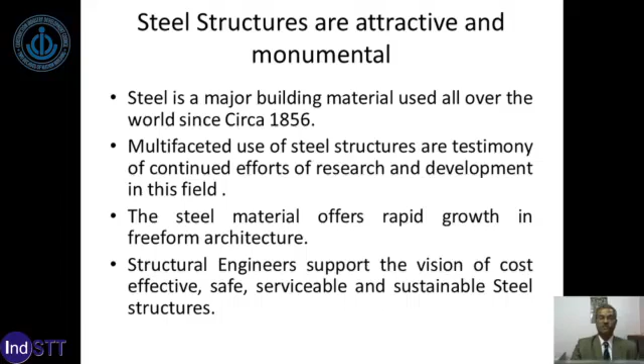Steel is a major building material used all over the world since circa 1856. Multifaceted use of steel structures are testimony of continued efforts of research and development in this field. The steel material offers rapid growth in free-form architecture. Structural engineers support the vision of cost-effective, safe, serviceable, sustainable steel structures.

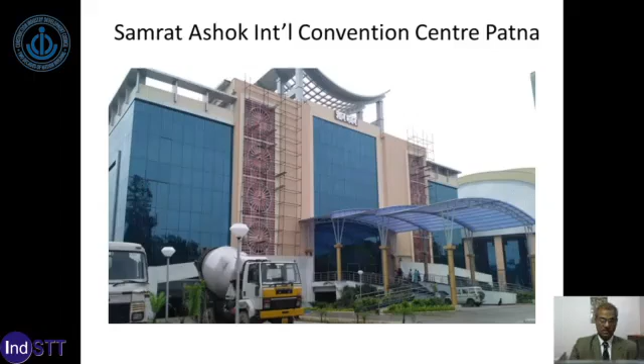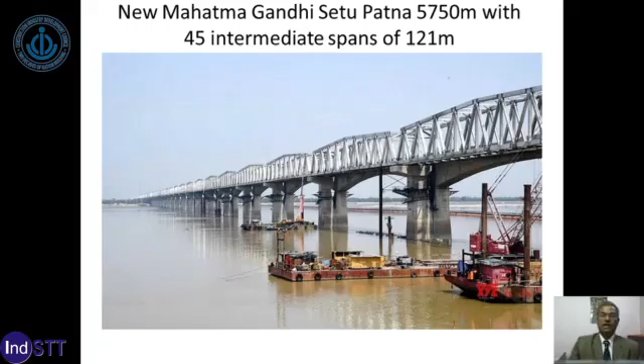Some landmark examples of Indian steel structures are the Howrah Bridge, the Samrat Ashok International Convention Center at Patna, which contains a Gyan Bhavan of 800 capacity and a Bapu Sabhagar of 5000 capacity. The Mahatma Gandhi Setu Patna, which is 5.75 km long, is another landmark steel structure. The Digha Railroad Bridge in Patna, which is 4.5 km, is a marvelous example of railroad bridge.

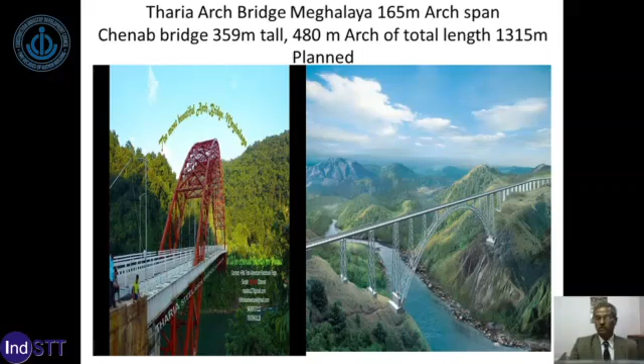The Tharia Bridge in Meghalaya and the Chenab Bridge in Jammu and Kashmir, which is 359 meter tall and 480 meter arch of total length 1315 meter, has been planned. When it will come to reality, it will become the tallest arch bridge of the world.

The 305 meter TV tower in Fazilka and 471 meter tall guyed mast in Kattabomman in Tamil Nadu are other examples. O.P. Jindal Knowledge Tower in Hisar, which is 282 meter, and Wills Tower Chicago, which is 482 meter, are the marvelous examples of high-rise steel structures.

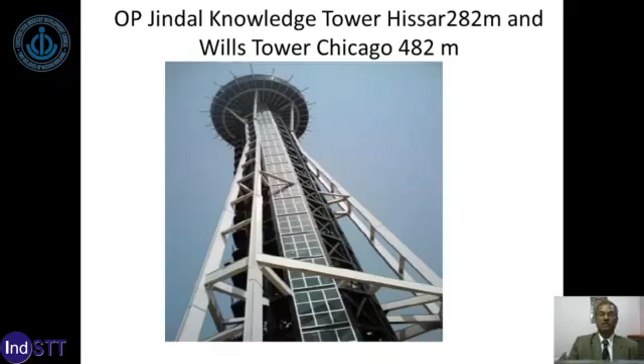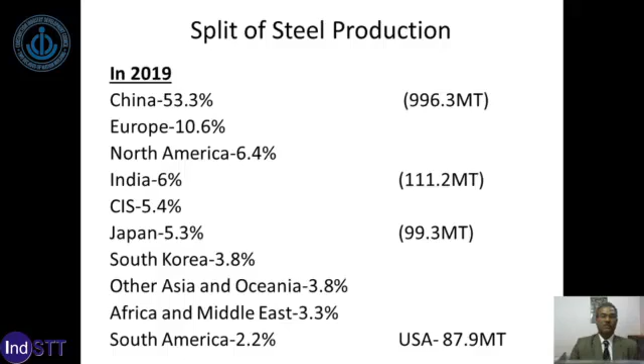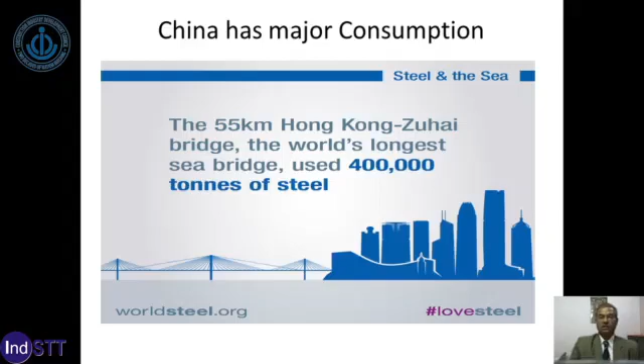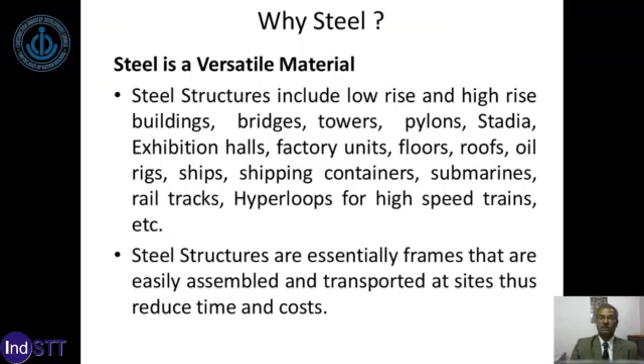Steel structures include low-rise and high-rise buildings, bridges, towers, pylons, stadia, exhibition halls, factory units, floors, roofs, oil rigs, ships, shipping containers, submarines, rail tracks, hyperloops for high-speed trains. Steel structures are essentially frames that are easily assembled and transported at sites, thus reduce time and cost.

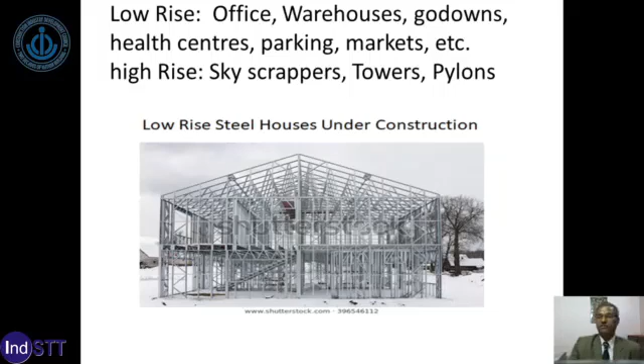Low-rise buildings, offices, warehouses, godowns, health centers, parking, markets, etc. are examples for low-rise buildings. High-rise examples contain the skyscrapers, towers, pylons, which are all possible by the use of structural steel.

The advantages of steel are high strength, ductility, high stiffness, ease of fabrication, and competitive cost. Steel is preferred in the situation where loads and spans are large. Steel is preferred in high seismic zones due to its high energy dissipation characteristics. Steel lasts for generations, so you can build your houses for grandchildren.

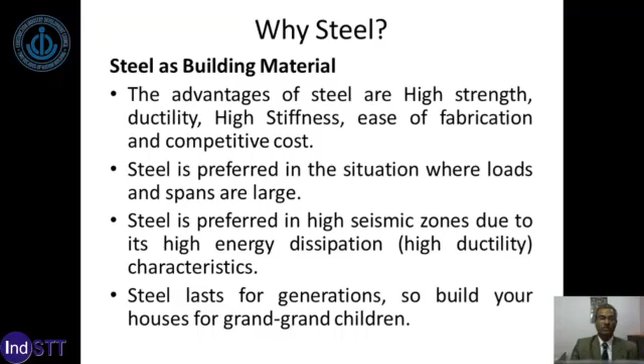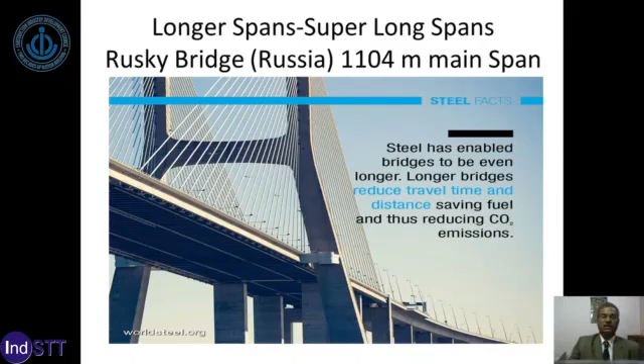With the advent of high strength steel, longer and super long spans of cable stayed and cable suspension bridges have become the reality. One such example is the Russky Bridge in Russia, which has a 1104 meter main span, a marvelous cable stayed bridge. Different grades and sections of steel, whether hot rolled or cold formed sections, have made structural steel capable of making any type of steel structures.

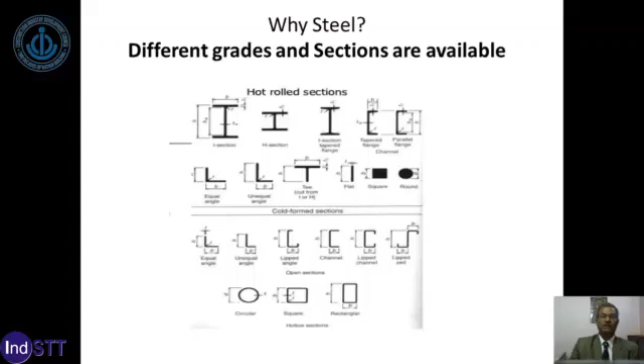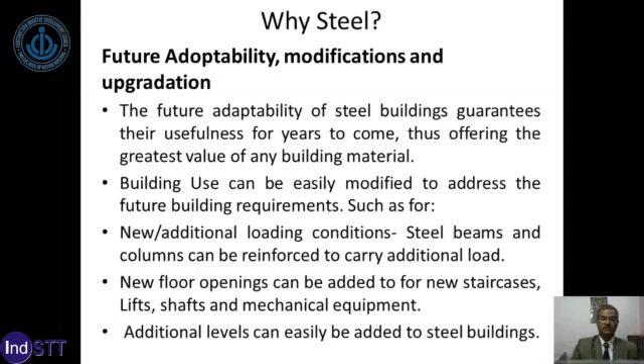Future adaptability, modifications and upgradation of steel buildings guarantees their usefulness for years to come, thus offering the greatest value of any building material. Building use can be easily modified to address future building requirements, such as addition or new loading conditions. Steel beams and columns can be reinforced to carry additional loads. New floor openings can be added for new staircases, lifts, shafts, and mechanical equipment. Additional levels can also be easily created.

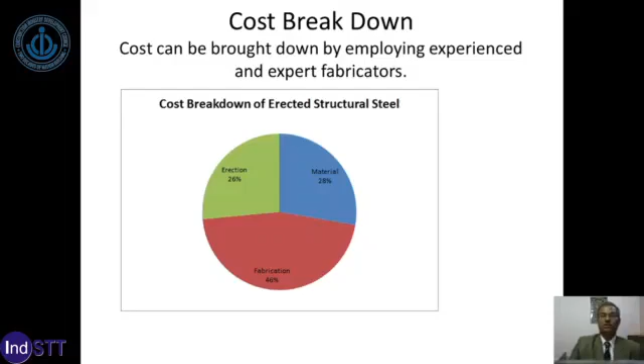Let's have a breakdown on the cost of a steel project. It's seen that fabrication cost is 46%, which is the major share in the cost. So it is evident that the cost can be brought down by employing experienced and expert fabricators.

Lower life cycle costs, recyclability, sustainability are the major factors which add to the growth of structural steel. Steel structures provide long-term durability with lower life cycle costs. Steel can be recycled over and over again and remade into new members without any loss of quality.

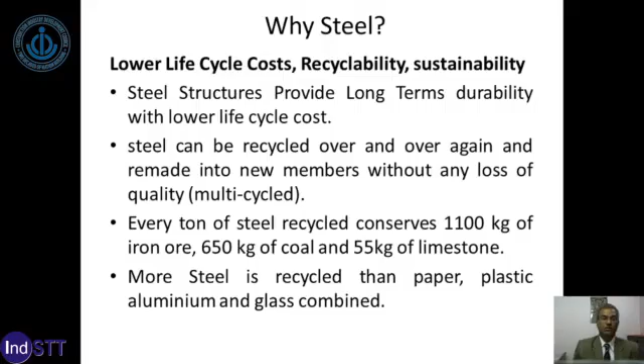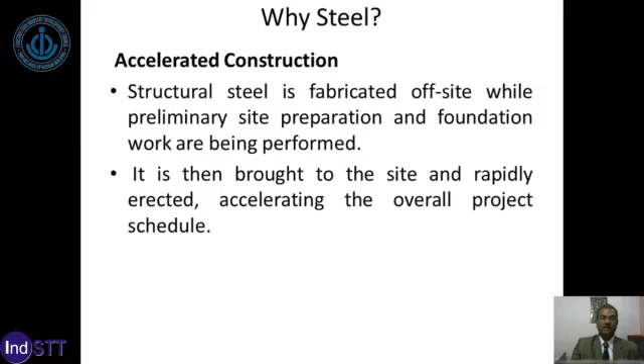Accelerated construction is another advantage attached with structural steel. Structural steel is fabricated off-site while preliminary site preparations and foundation works are being performed. It is then brought to the site and rapidly erected, accelerating the overall project schedule.

Deconstruction is another aspect of steel construction. Beams, columns and other structural steel elements are removed from a building and can be refabricated for use in new structures. Modular construction is another aspect which can boost construction in steel.

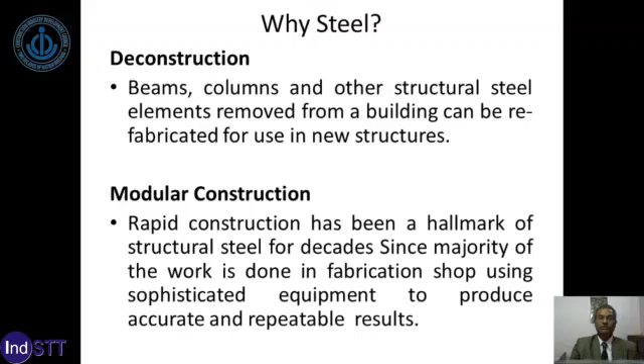Rapid construction has been a hallmark of structural steel for decades, since the majority of the work is done in a fabrication shop using sophisticated equipment to produce accurate and repeatable results. For example, an 8-story building with spans of 13 meters between columns can be erected twice as fast as concrete equivalents, resulting in up to 24% construction cost savings and more usable space.

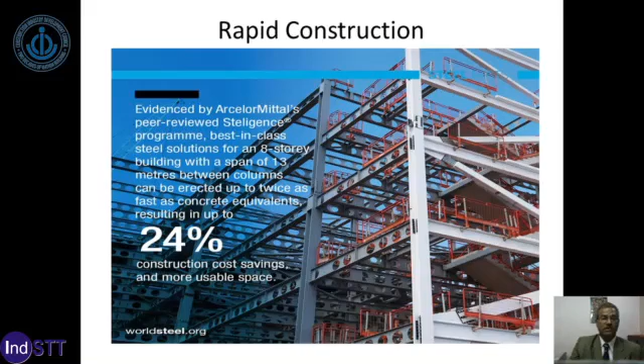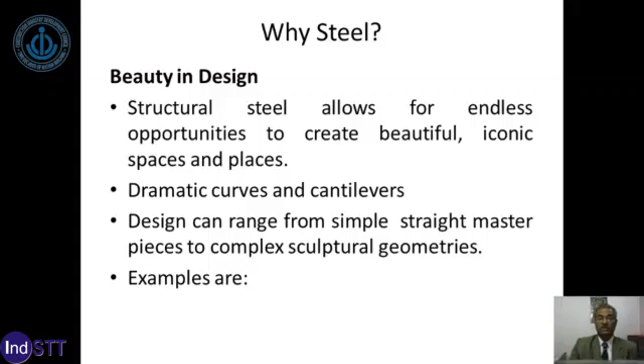Beauty in design is another marvelous aspect of steel buildings. Structural steel allows for endless opportunities to create beautiful, iconic spaces and places. Dramatic curves and cantilevers add to the beauty of the structures. Design can range from simple straight masterpieces to complex sculptural geometries. Examples are the Agora Garden Tower in Taiwan and the Denver Union Station.

Aesthetically pleasing structures can be had from structural steel frames. Structural steel frames provide designers with a wide range of options for addressing a project's aesthetic requirements. Structural steel can be rolled, curved, and integrated into irregular building shapes.

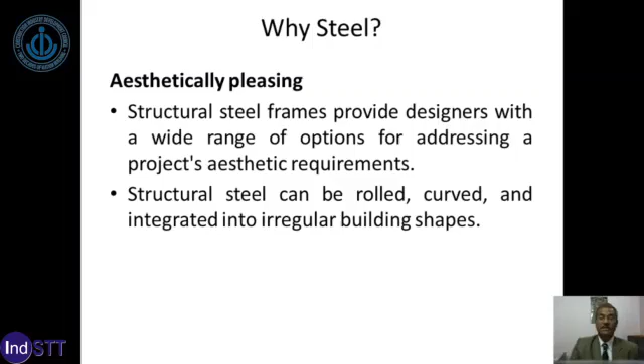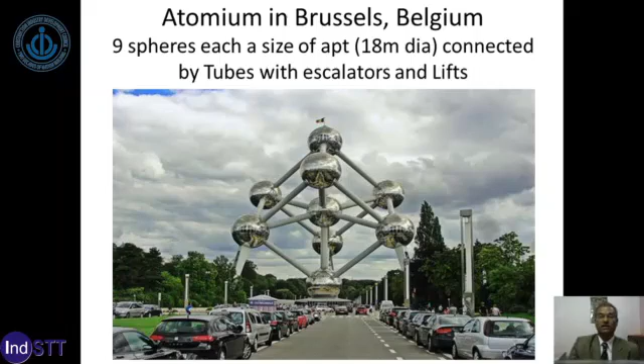Atomium in Brussels is another example. 9 spheres, each of 18-meter diameter, are in the shape of apartments. These spheres are connected by tubes with escalators and lifts.

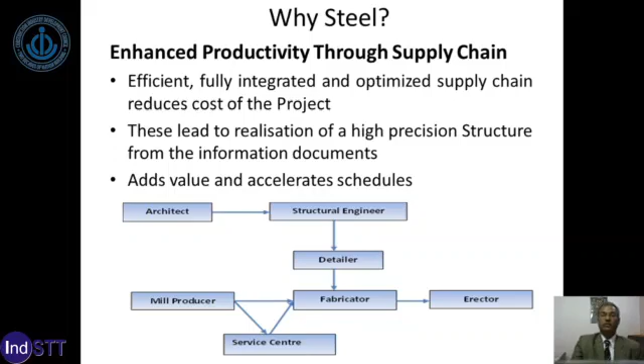Enhanced productivity through optimized supply chain reduces cost of the project. These lead to the realization of a high precision structure from the information documents. So it is evident that enhanced productivity can be had through management of supply chain.

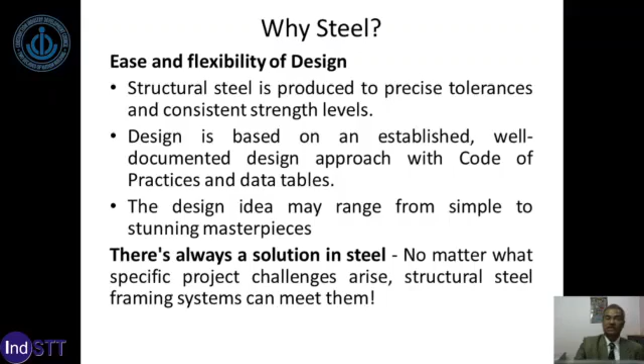Ease and flexibility of design: structural steel is produced to precise tolerances and consistent strength levels. Design is based on an established, well-documented design approach with codes of practice and data tables. The design idea may range from simple to stunning masterpieces. There is always a solution in steel. No matter what specific project challenges arise, a structural steel framing system can meet them.

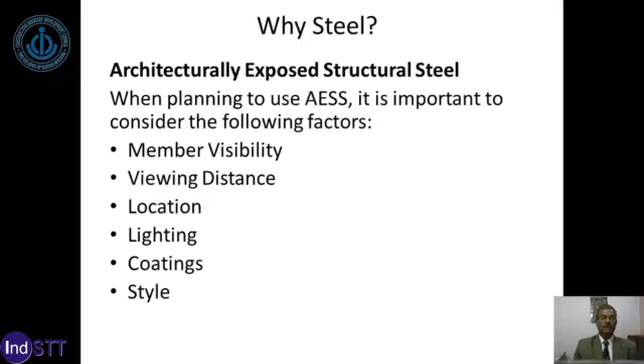Architecturally exposed structural steel is another advantage which can be a boosting factor for construction and aesthetic appearance in steel buildings. When planning to use architecturally exposed structural steel, importance should be given to member visibility, viewing distance, location, lighting, coatings and style. An example is Florida Polytechnic University.

Some design considerations that must be given due attention are thermal performance, serviceability, blast and progressive collapse, acoustics and vibration, seismic design, facade attachment, and fabricator and erector certification. All these considerations will lead to a successful steel project.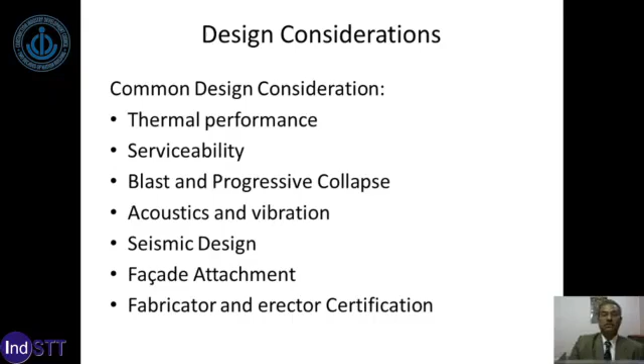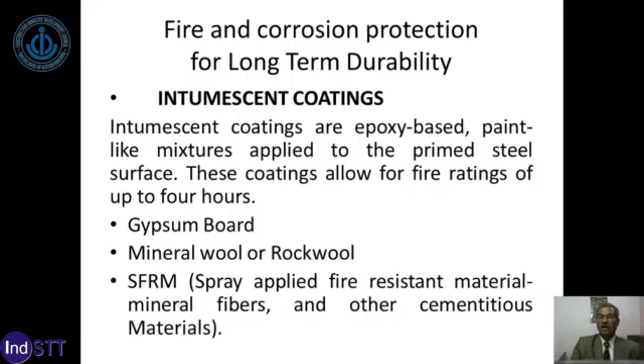Fire and corrosion protection for long-term durability must be addressed. Intumescent coatings, gypsum boards, and several SFRM spray-applied fire-resistant materials, mineral wools and rock wools are used to enhance the fire ratings of buildings.

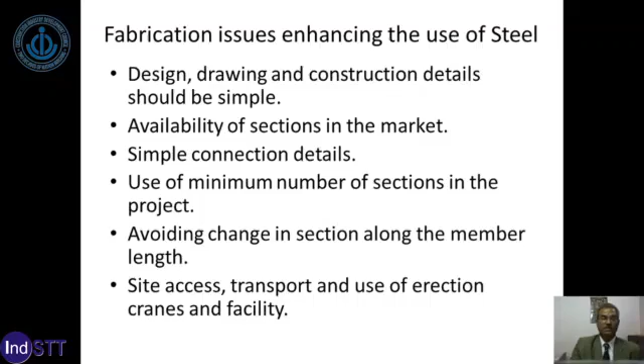Some fabrication issues enhancing the use of steel are: design, drawing and construction details should be simple; availability of sections in the market should be ensured; simple connection details should be given; use of a minimum number of sections in the project should be practiced; avoiding change in the section along the member length should be practiced; and site access, transport and use of erection cranes and facilities should be ensured.

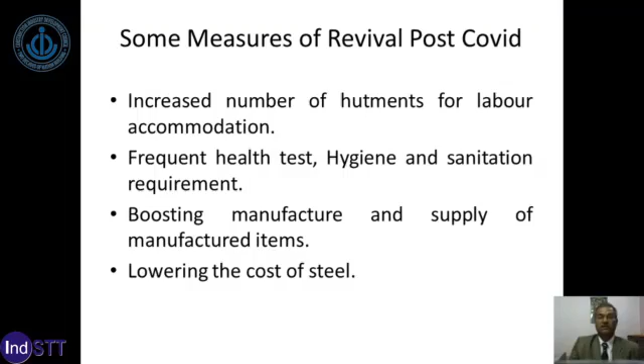Dear friends, I am going to focus on various reasons as to why we should make use of steel in different sectors. It is a well-known fact that the use of steel is considered to be an index of economic growth of any nation, whether it is housing, trade, commerce, transport, agriculture, health, construction or manufacturing.